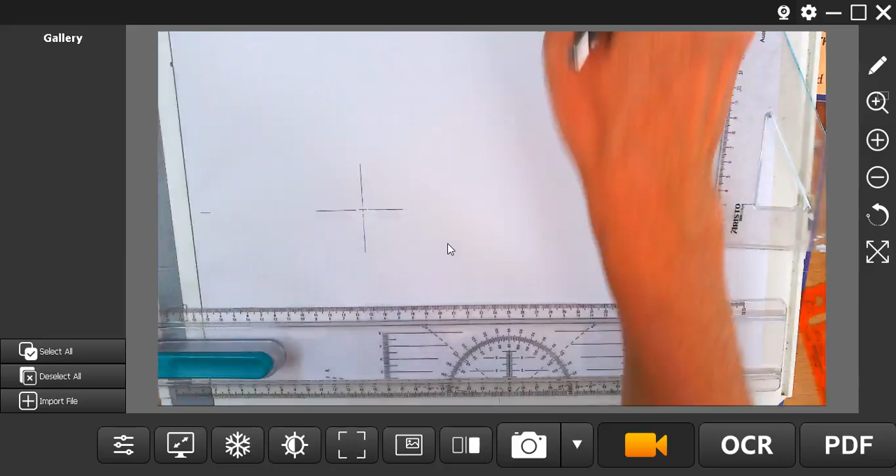Okay, so we are recording page 26 in the EGD book. So page 26. Alright, and you guys had a little circle in here. That circle had a radius of, I think it was 12 millimeters. Okay. Just going to quickly draw that circle there.

So for this one, I'm going to use a circle stencil. You already have this circle on your page, but I'm going to be drawing a new circle there, and I think it was diameter 12. Hoeveel? 15. Okay, diameter 15. Let's have a look. There's diameter 15. I say perfect, thank you very much.

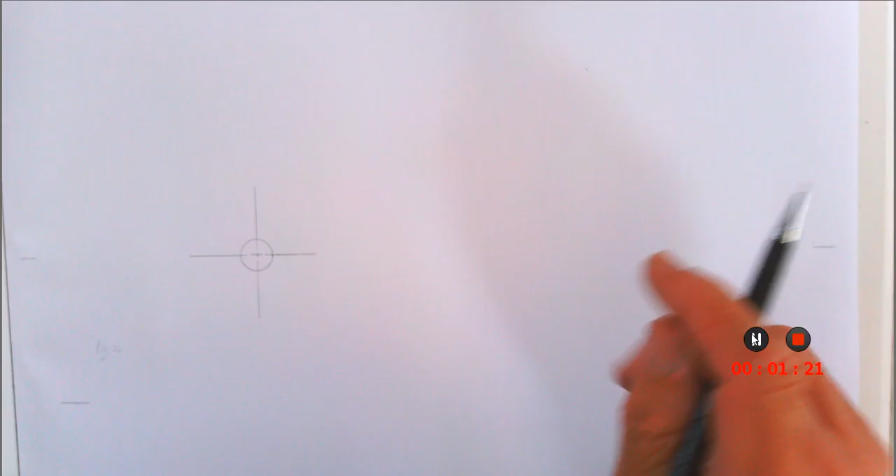Okay, so diameter 15. So I'm going to line up these holes with my center line. Like I said, you have this already on your page. So ek trek hom gou vir myself daar. I'm just going to draw that circle there. Okay, otherwise I would have to use some of the students' pages, and I didn't want to do that. Okay, let's just refocus this thing quickly here.

Alright, so now we're gonna start drawing. We're gonna make this drawing. Now it looks something like this. It's actually something that you will find inside of a lock. Okay, so if you open up a lock, you will many times find this part here, and then you will have a little circle there, a part where this can fit through a shaft, and then these things are part of the lock. Sometimes you see it's a 2-lever lock. It would mean it's got 2 of these little parts there inside of the lock. So this is what jy gaan teken.

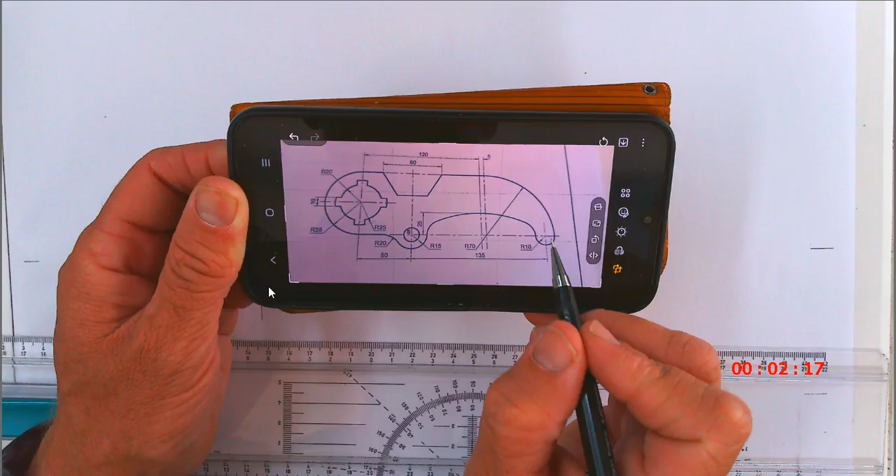Now we have this little part here at the bottom, and the measurements are, it's 135 millimeters from there to the next part, and then 50 to the other side. So ek gaan hierdie center lyntjie gou trek. I'm going to be drawing a center line there, 50 to the one side, 135 to the other. Okay, julle kan dit saam met my doen. So I'm going to draw the center line here, long short line. I'm going to draw it all the way through to this side. Okay, so there's my center line.

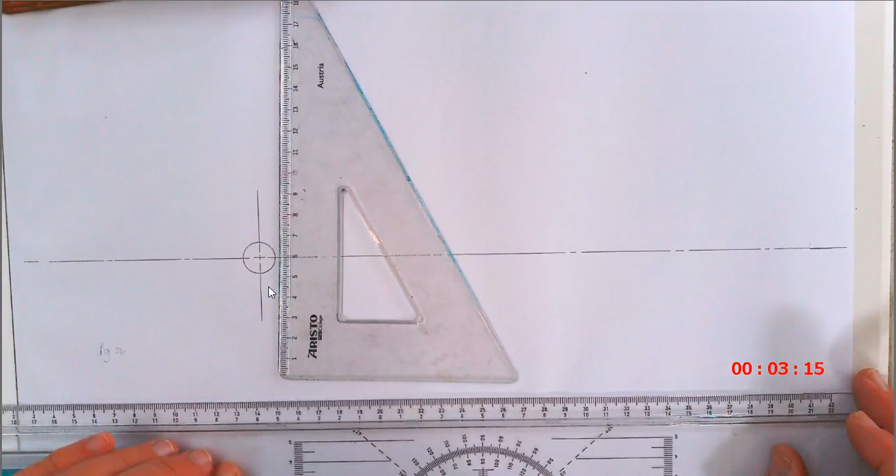Then I am also going to put in a vertical line here, which I already have. So 'n vertikale lyntjie daar, kan hom van posisie kry. So I'm going to extend this line. Center line is the line on which I indicate the center of an object, or the center of a circle. Okay, nou moet dit wees 135 na die kant toe, so it's 135 to this side.

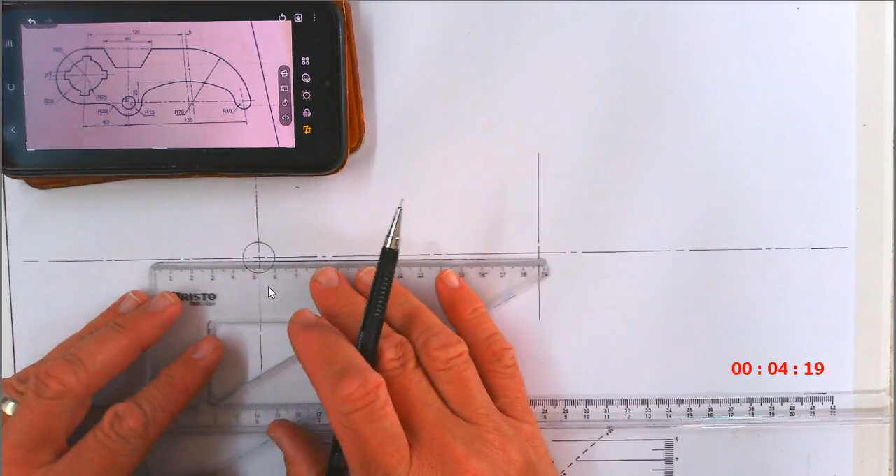So I'm going to start by the 1, so I'm just going to go 1 centimeter further here. There's going to be my next center line. En nou 'n nuwe center lyntjie trek, so 135 mm. Jy kan kyk na daai afmetings op jou bladsytjie tot daar. Maak my nuwe center lyntjie daar, so it's 135 mm from there to there. On the other side it's going to be 50. There's the 50. And I'm going to draw a new center line over there.

So I'm going to be putting in a little center line here as well. Okay, I'm going to draw that up all the way. That is going to be this line over here, is that one. That line is this one. Daai lyntjie is daai ene.

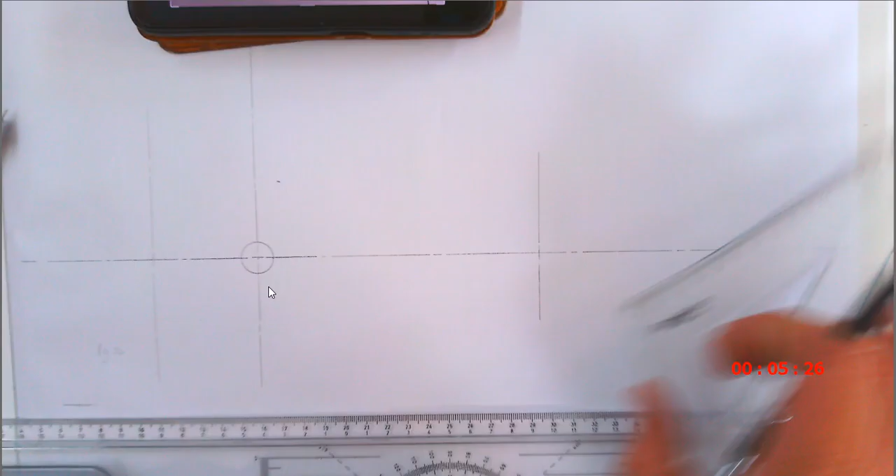Goed. Nou gaan ek 'n sirkel trek met 'n radius van 15. So I'm going to be drawing a circle with a radius of 15 millimeters. Kom ons meet hom gou af daar. If you have a circle stencil, you can use that.

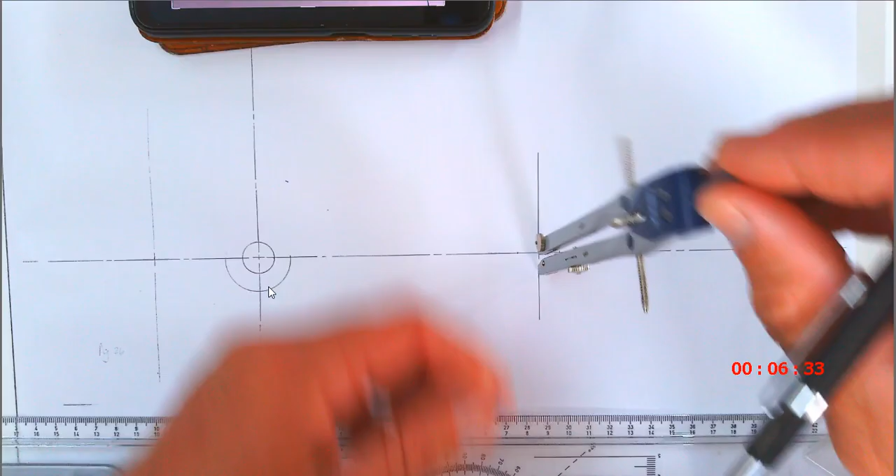If I do it nicely and accurately, this doesn't look that accurate. It's like I mentioned, some of the compasses, the legs of the compasses are not always fixed as they should be, and if it has a bit of movement on it, it gives you an inaccurate circle, which you don't want. You can clearly see that circle is not accurate, so I'm just going to erase this circle quickly. Net so vinnig uitvee. I'm rather going to use a circle stencil for that one.

En nou daai boonste deel, the upper part, I can erase.

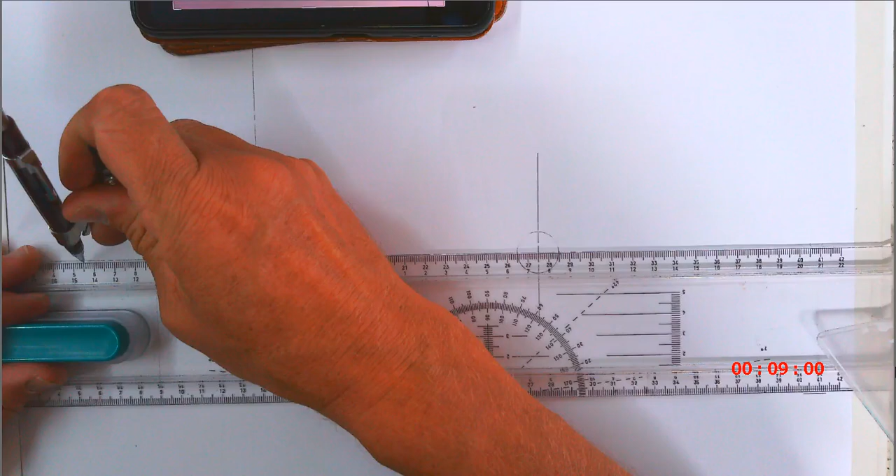Radius 35. So I'm going to set my compass to 35 millimeters. It's going to be up to there. There's radius 35. Let's see on your page, radius 35. Just going to quickly make sure this is accurate.

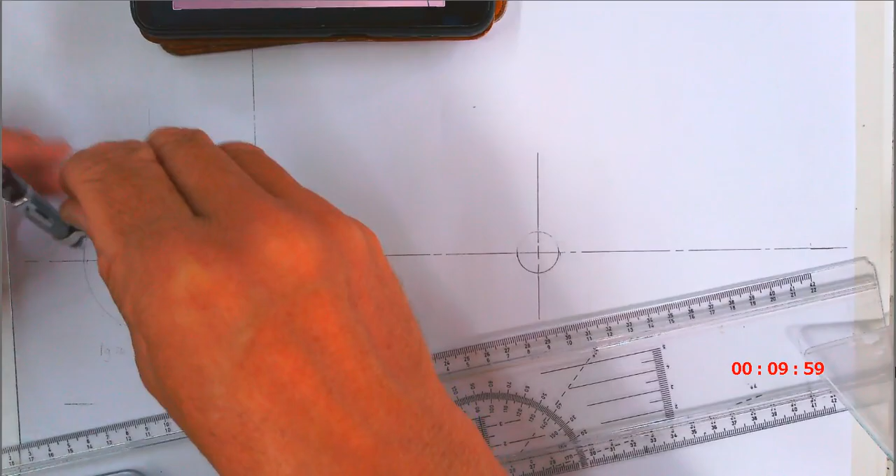Okay, there's my radius 35 circle. It seems this thing is not accurate. I know. Let me just double check this again. Okay, it should be 35 in this direction. This compass has moved slightly.

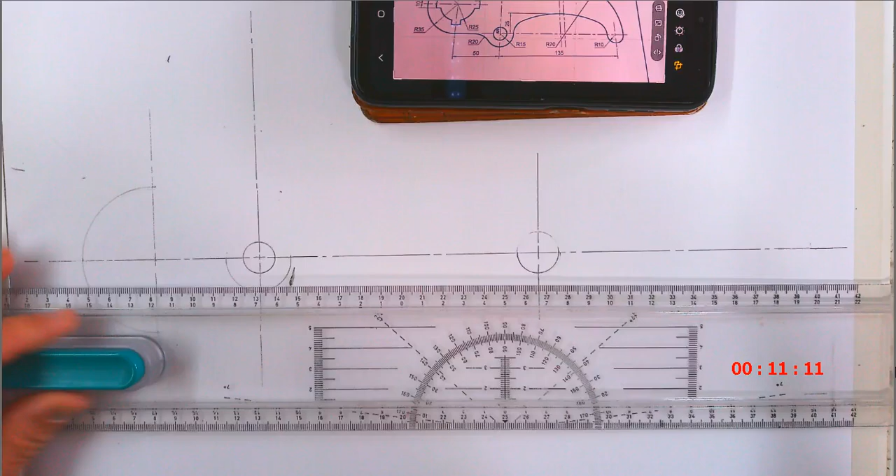And draw a construction line there. Now they tell me here is a hexagon that must be 60 mm. 60 we can measure off, so it is 30 to the one side, 10, 20, 30, and another 30 to the other side. Okay, and now I know I can use this triangle to be able to draw that without construction.

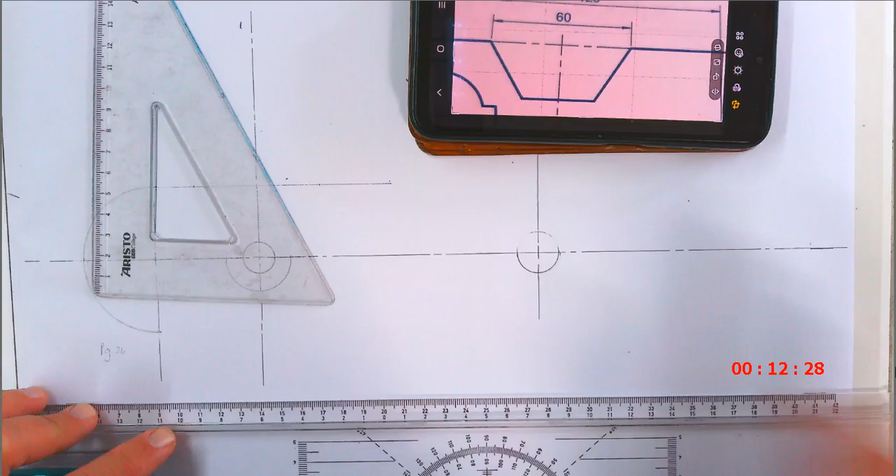If you know your hexagon, you can do your own construction, but you can also use this triangle. From there, just draw your line in, turn my triangle around.

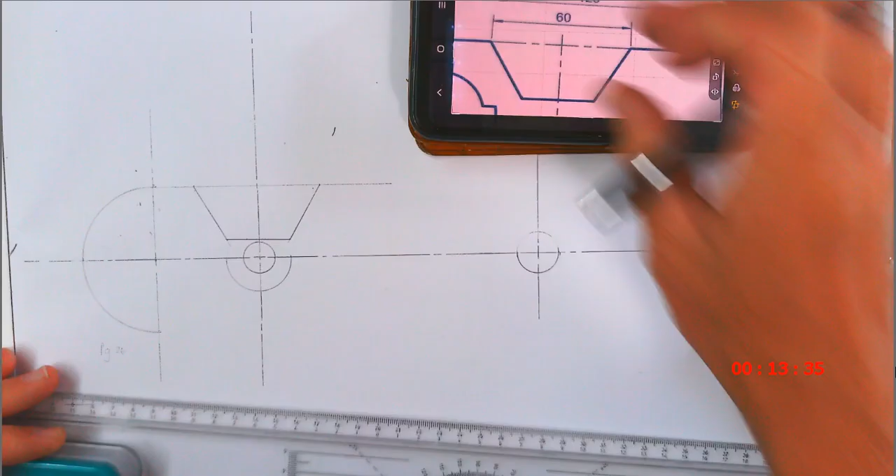Right, now if I zoom out, I have that circle, but this circle is too high up. Okay, what do you see? What mistake did I make on this drawing? So the mistake I made is I drew this circle there, which is correct, but then I used that as my center point, which was wrong.

This line was supposed to be 35 from there to there. So these two things are going to have to move up. If you did it the same way, I'm sorry about that. We're going to have to quickly fix that. Sometimes this happens. Let's say this happens in a test. You're not going to redraw everything. You're just going to construct vertical lines upward.

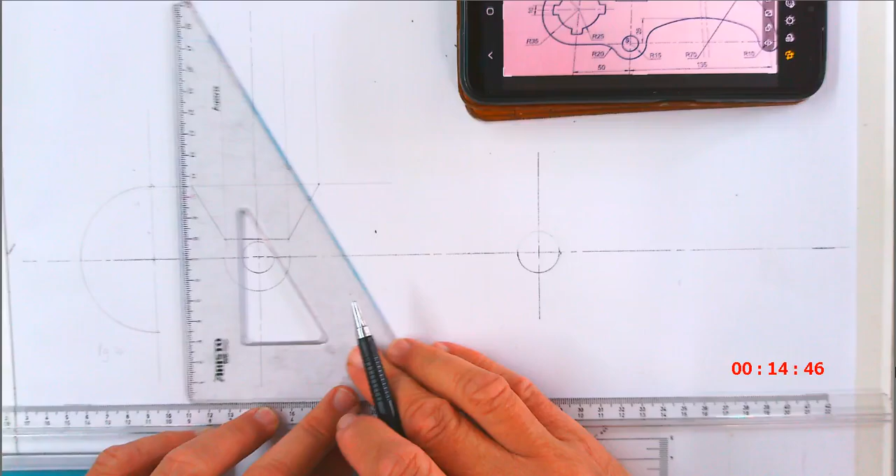We're just going to move those lines up. Sorry about that mistake. So I'm just going to move that up a little bit, and I am going to bring this line in. So that line will just have to go up to there, and then from here 35 up, which I already have. So I'm just going to use my compass again.

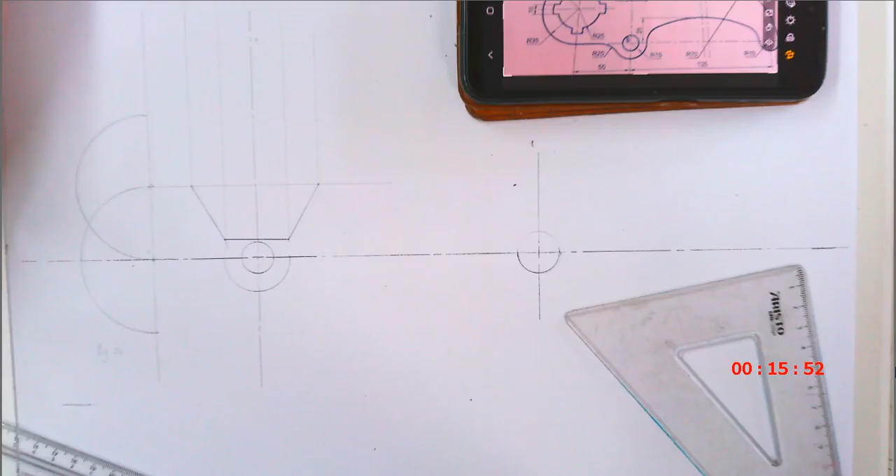Sorry about that mistake there. Okay, I'm going to erase this part over here. Erase that part there. Okay, I'm just going to move this up. So I am going to have a line here, over there. Trek hom net oor. I'm just going to move that line up and across. And now I'm just going to move these lines upward. So it's actually not that difficult.

Just going to take this line. Just going to move it up. So I don't have to redraw everything. And I can also do this. That's the same angle. Actually just put a line across here.

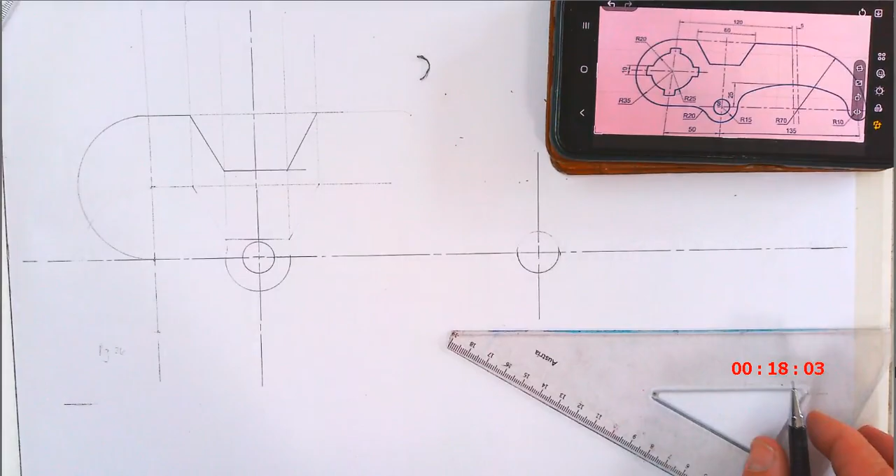You guys can finish this drawing at home. There's maybe one thing that you can leave out. That radius there at the bottom, but you can go and watch the video. I'll show you how to do that. That is an ellipse. Daar is 'n ellipse wat daar lê, né? That is an ellipse that you see over here. So this part you should be able to do.

So basically, from there to there 15 plus another 10, 20. Okay, on that arc, I'm going to select another point.

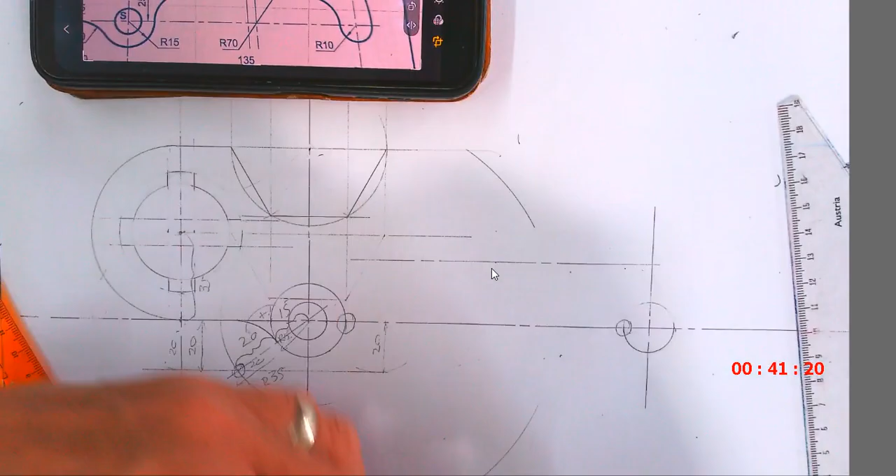It's a normal bisecting a line, and I'm going to use that to just find the center point or the center line for this ellipse that we are going to draw now. You don't have to do it this way, but I would suggest it. It's more accurate. I'm going to put in a center line for myself. Okay? And now at this stage you guys have practiced the ellipse. Now you know by the ellipse that if you want to draw an ellipse, we are going to need the height. There's the height of the ellipse. So it must be 25.

There's the 25. So I'm going to quickly swing it over with my compass, just to make it more accurate. We can also double check our distances. And to put it in there, we quickly check if it's right. So this measurement of 25 should be the same measurement at the bottom.

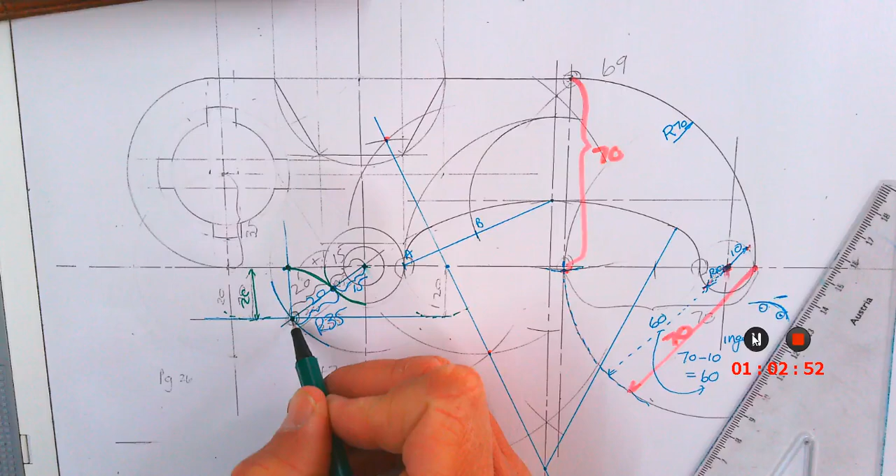Radius 35, so I opened it up on radius 35, and I drew this circle. I'm just going to draw this freehand. For clarity, this doesn't fit into my compass.

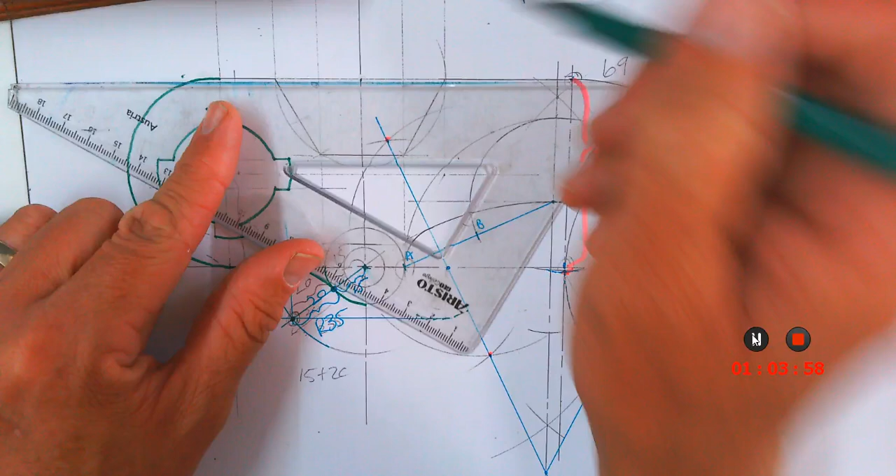I drew in that one, I drew a line. I didn't have this, but they told me that if I go straight up from this point, I'm going to get to the center point of the hexagon. So I open up my compass, they told me it's 60 from there to there, which means 30, 30. I could have drawn this with a 30-60 degree triangle, or I could have opened my compass on radius 30, and I could have just marked it off.

Draw a circle on radius 30, just mark it off, like I would draw a hexagon, so it's nothing. That line you could have just connected, these lines must also be drawn in.

Okay, that circle I could have extended to there, so I also draw that circle on there. Remember, you have the circle here on the other end, so we drew this one in as well, and these were the points that I needed for my ellipse. And they also told me that from there to there, that height should be 25. So that is my other point for my ellipse. So you have to do a normal ellipse construction. That's the blue line there.

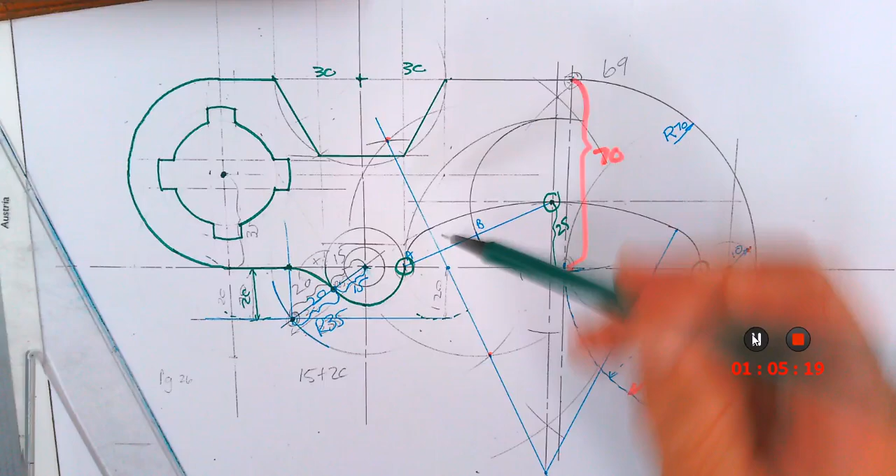Take this distance, swivel it around.

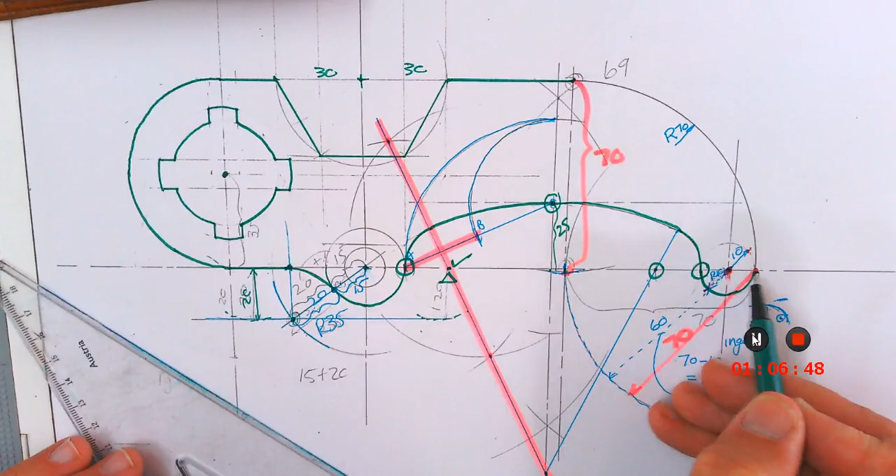And I join this arc using that point over there. And then the last part of the drawing you saw, I drew this line up to that point, and I opened up my compass, radius 70. From that point also 70. If I use the center there, it should be on 60 because it's 10 less from the side there. And then get a center point, and I would have simply drawn this last arc.

Sorry for the freehand. This last arc that you saw there. Okay, so that's my whole drawing. So a lot of stuff you have to do, but basically break it up into little chunks. I told the kids it's like baking a cake. You know how to mix, for instance, a normal chocolate cake, but if you want to make trifle, you're going to have to know how to make jelly, and the jelly could be the ellipse, the cake could be the hexagon, and now you just put all the parts together to form a new drawing.